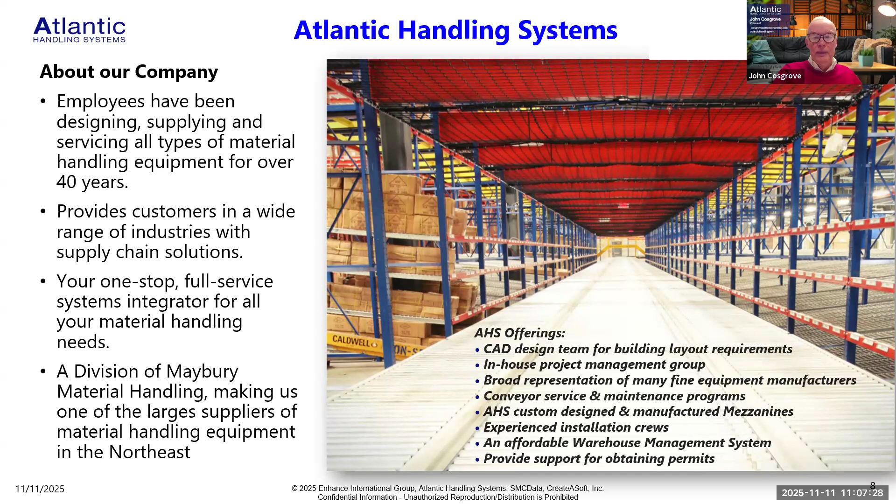Good morning, everybody, thank you for coming. I represent VAI for the past 25-plus years. It's a single database software that has manufacturing, distribution, food, and pharmaceutical in it. Single database—there's no need to have multiple software that can create integration issues. VAI has 200 employees, 5 locations nationwide, and support 24/7. 90% of the 200 employees are technical people. Training is done on site, and after you go live, the technical team and support team stay on site until they ensure everything is working well.

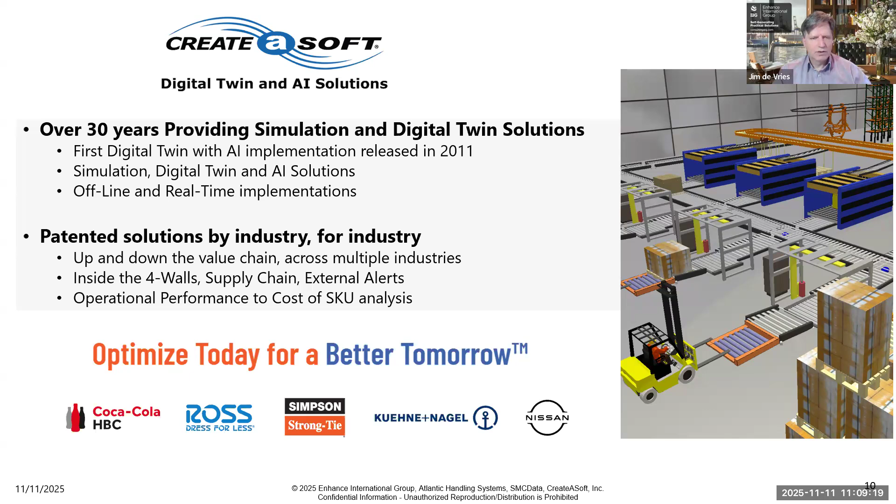Thanks, Hosni. Thanks, Danny, and thanks, John. We look forward to a very interesting webinar today with lots of feedback from everyone. Our agenda today is we're looking at the challenges of leveraging AI and automation in your facility, and then we'll get into the remedies to overcome this through this joint venture of our different partners here, and then we'll walk through that solution from consulting all the way through ERP selection with Danny's system and how that works, automation of equipment, and of course the AI digital twin. And then the role of the digital twin will be addressed, as well as benefits and return on investment. And then the case studies will be interlaced throughout the webinar, just to let you know.

Let's get started with the challenges. So the way we look at it is there's a convergence, over the last 10, 15 years, of operational technology, meaning your physical equipment, your SCADA systems, all of your electronics on the floor and in the warehouse. And then you have your information technology that sits in the ERPs and the business systems off to the side. So somehow we got to get these things to talk to each other.

So there are some challenges in that and drivers. Some of the drivers, of course, we're trying to create that efficiency, safety, and sustainability over time. And then there's these legacy barriers that we've had ever since I can remember, which is how do we get these systems to talk to each other? Data are siloed. Most ERPs are financially based, not transactionally based, therefore a very big challenge. And then data is controlled within the silos. That's driving that trust and change management challenges that we're all encompassing.

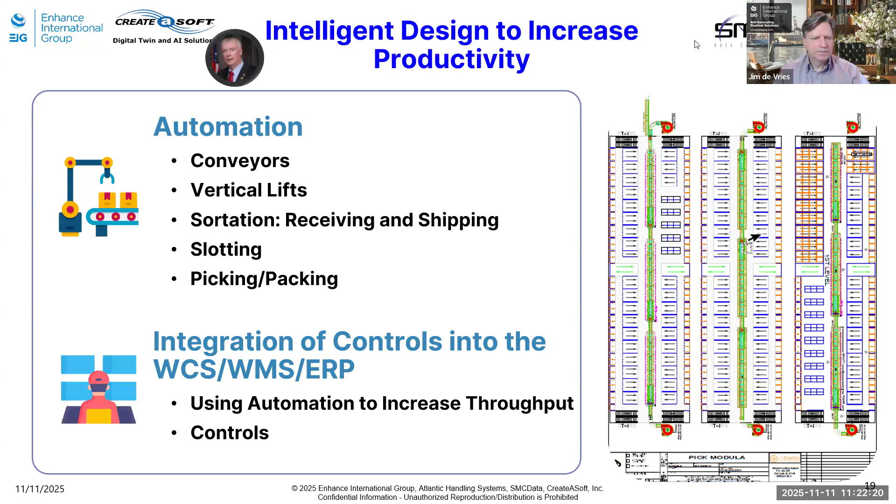Okay. So what you see here, we're going to walk through the solution: consulting, ERP, WMS automation, AI digital twins.

On the right, you see coming out of a pick module is a spiral conveyor, which takes up less real estate within the warehouse and helps you bring cases down that have been picked on the upper levels.

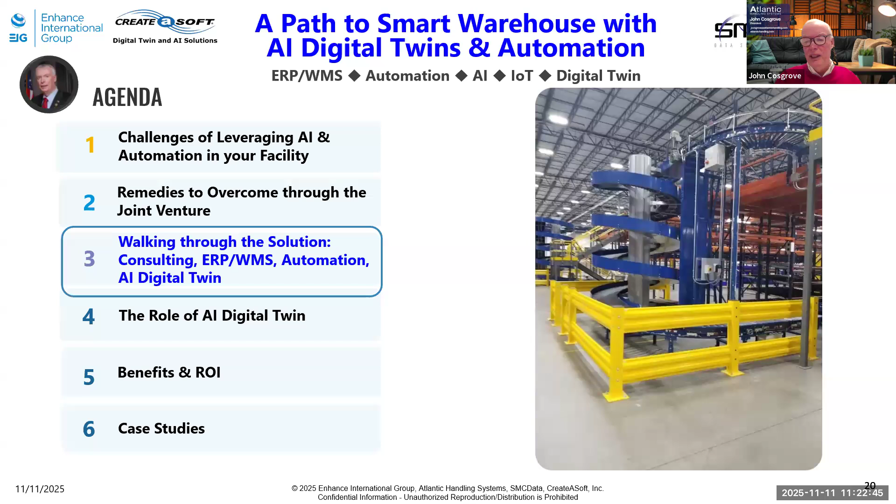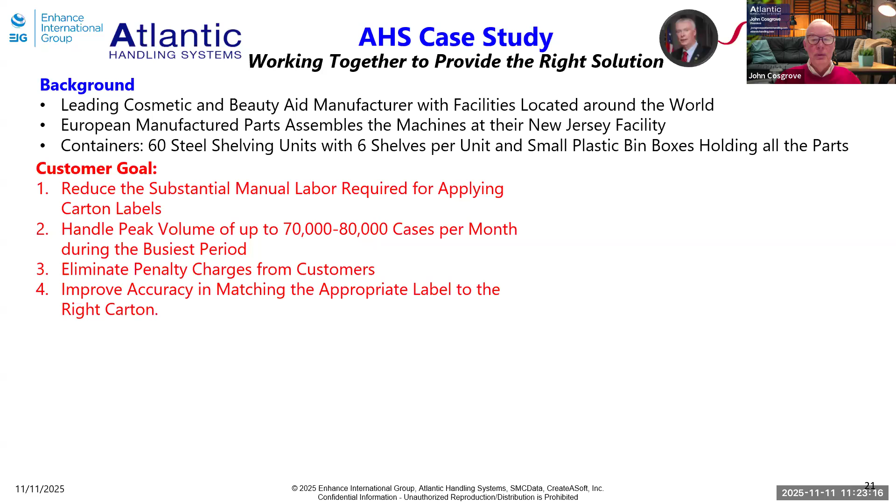This is a case study that we had done. It's a leading cosmetic and beauty aid manufacturer, located around the world. What they do is they came to us and they had a problem with applying UCC 128 labels by hand, and in August they would bring in 30 temporary employees, and we had to come in and help them to do that. If you go to the next slide, Jim, I'll just show you real quickly what we have.

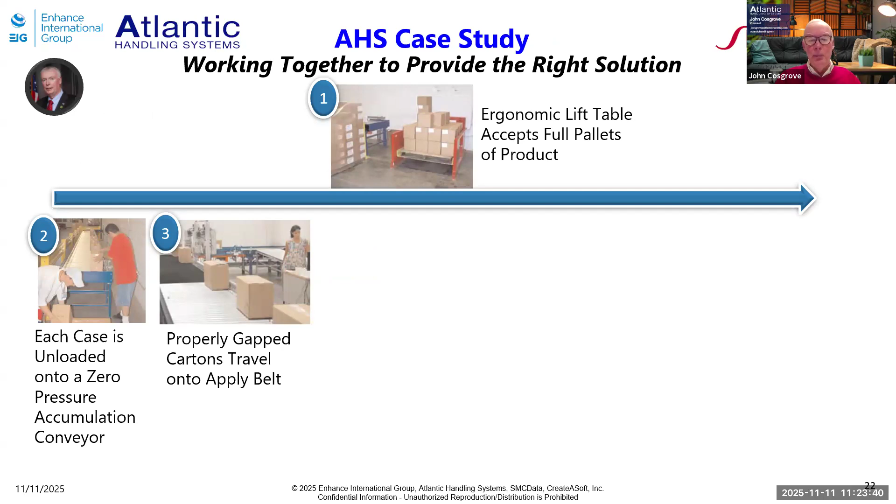If you look at it here, we start with an ergonomic lift table, which prevents back injuries and so on and so forth. And then they would load each case onto a zero pressure accumulation conveyor. We gap the cartons so that we can bring them into a print and apply station, where we apply 3 different labels that were required by their end users.

We run them through a barcode scanner to check and make sure that the placement of the labels is correct, because that averts any fines that might be issued against them. When problems are found, we have what we call a reject lane. If it's a bad read, we'll send it down the reject lane. Then all cases are sent down and sorted and loaded onto pallets for shipping.

This was rated by this specific Shiseido Cosmetics as the #1 project in the world, actually, and they won a big award for it because we eliminated 30 temporary employees. They were doing about 800 cases a day, and when we got the system in, they can do 5,000 a day now. Amazing, amazing, great story, John.

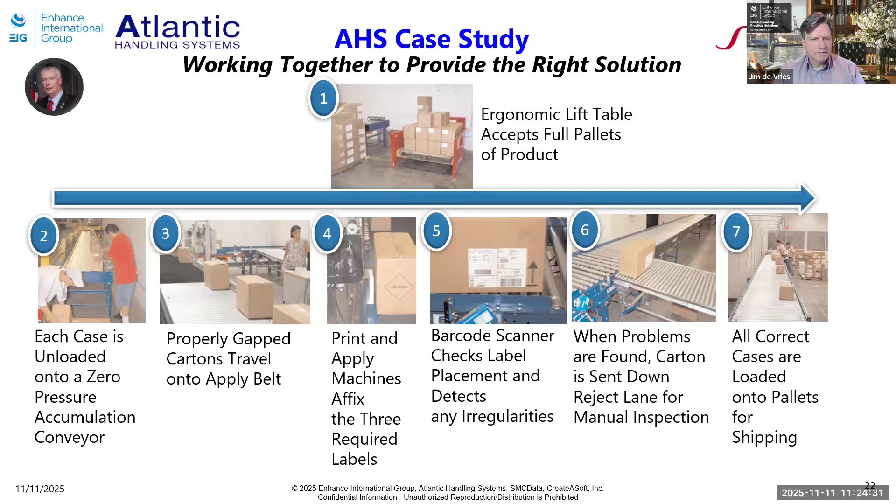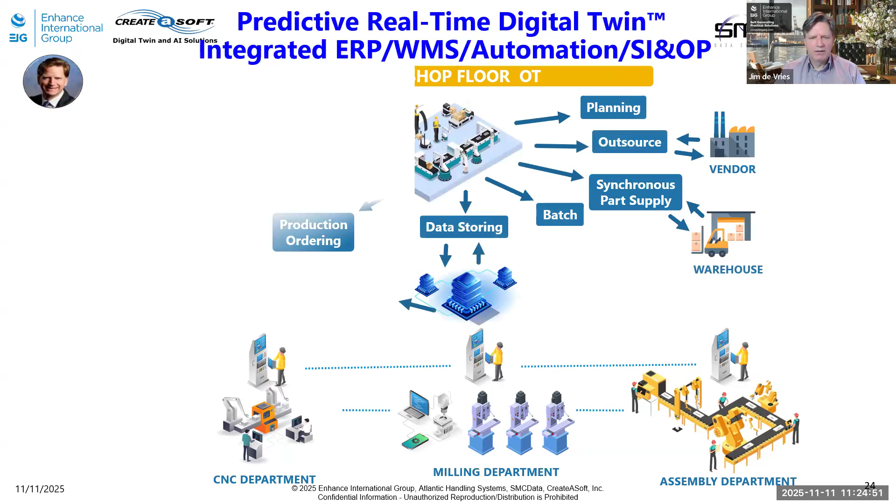So next, we want to get into the role of the AI digital twin. In any manufacturing facility, you might have a CNC area, you may have a milling department, you may have an assembly area, but behind the scenes, you have all this data for monitoring, planning, data storage, batching, planning and outsourcing, warehouse data, and you have your ERP.

So just wanted to show this diagram to say what we were doing is putting like a wrapper on top of everything, where we're pulling all that data from the MRP, the MES, the SCADAs, your Internet of Things, into centralized data marts, into BI. This is a traditional thing that most companies are doing as part of Industry 4.0. But what we're doing that's different is we're putting that wrapper on top of a real-time digital twin that allows us to do SI&OP live, because the data in the digital twin from CreateASoft is actually updating in real time.

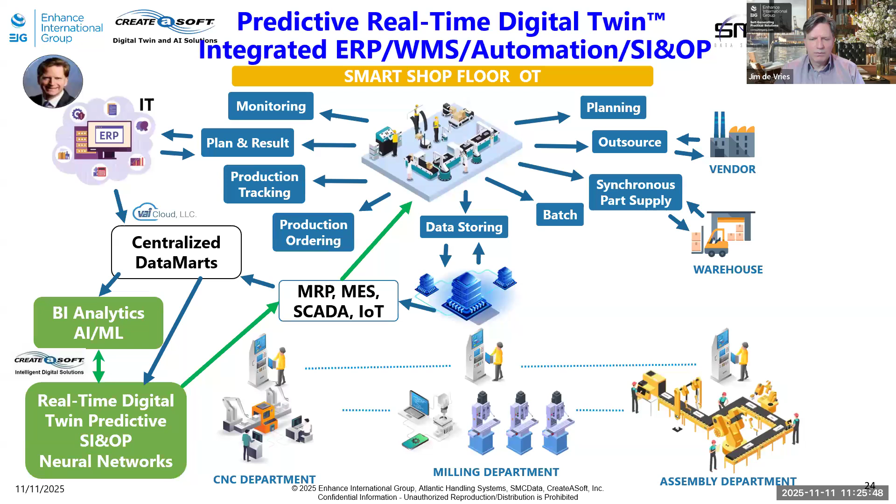And Hosni will explain a bit more about that. Thank you, Jim. So before we go any further, let's make sure we're all in agreement on what we call a digital twin.

A digital twin is a true representation of the live environment. It's not a pure simulation, it's not a visual representation. It is an actual plant or warehouse that works exactly the same, dimensioned exactly the same as the actual facility. It has all the components for all the materials flowing through, the material handling, the people—everything that runs within the live environment is in the twin. So this is not an approximation of live. This is as close to live as you can be, within 99% plus accuracy throughout the operation.

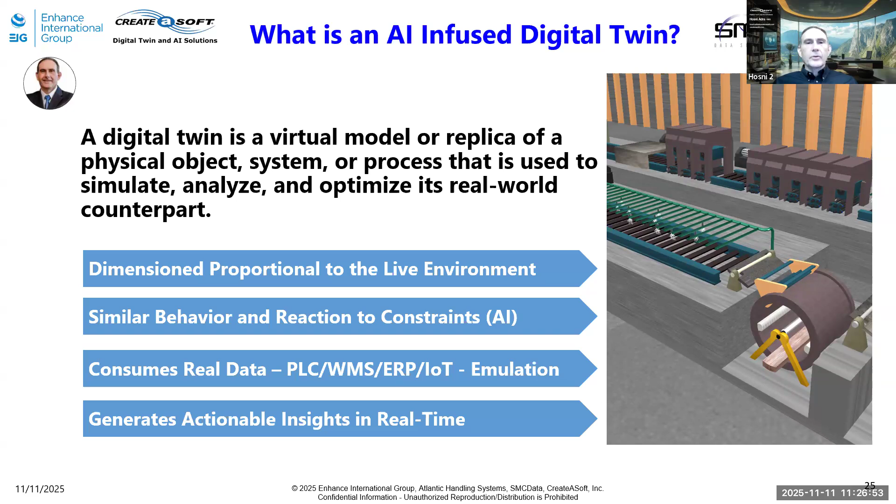Now this is also giving us a path to go to AI in real time. As you'll see as we go forward, having that specific data set will allow us to have more predictive insights and more accurate insights on what's happening and what will happen to the operation.

So if you look at any smart warehouse, you definitely have a WMS and ERP like Dani's system. This controls everything within the data itself—what's going into the warehouse, what's coming out. So this is your receiving, your replenishment, your put away. A lot of these systems have some kind of slotting environment built in. They have a scheduling system that's waving or providing data into the actual warehouse itself. So all this drives what happens within the warehouse from an ERP.

In some occasions, the ERP system and the WMS can actually send data to the automation, like in John's system, where it will tell the automation what type of labels it's going to print, what type of machine is going to print, what color. All these become components that are driven from the WMS into automation that John has built.

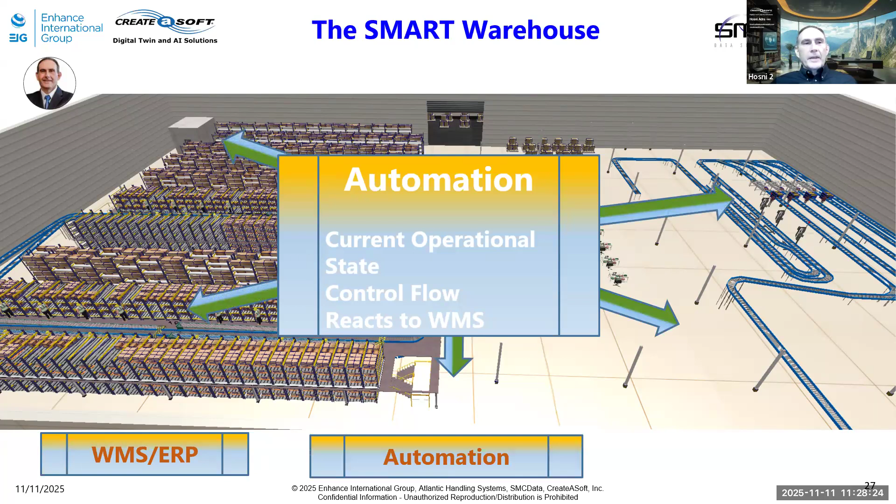Now that automation goes beyond just the print and apply. It goes into every single divert that you'd have within the warehouse. It goes through where you slot, how you move in the pick mods. All these become part of that integration from the WMS to the automation system.

So you take all this together, and there's a lot of data between them. Keep in mind, in this specific implementation, all the products have different sizes. Some of them are clothing material, some have weird shapes, some are just pure boxes that cannot be crushed. So there are a lot of limitations on what you can do within that.

So this is where AI comes in. Now we can put all these rules into an AI system that is properly trained, and it will start to identify better where we slot things, how we do our put away, when we replenish—all these key things required for daily operation that tie in the automation of what's happening live and the future of the operation and the demand planning coming from the WMS. So it puts all this together, and now it starts to operate the warehouse in a much more efficient way.

We got a question here, Hosni. Sure. So are we moving from collecting information on what people are doing to telling people what to do? Is that the flip you're working on, or are we recording what people are doing? How does that work?

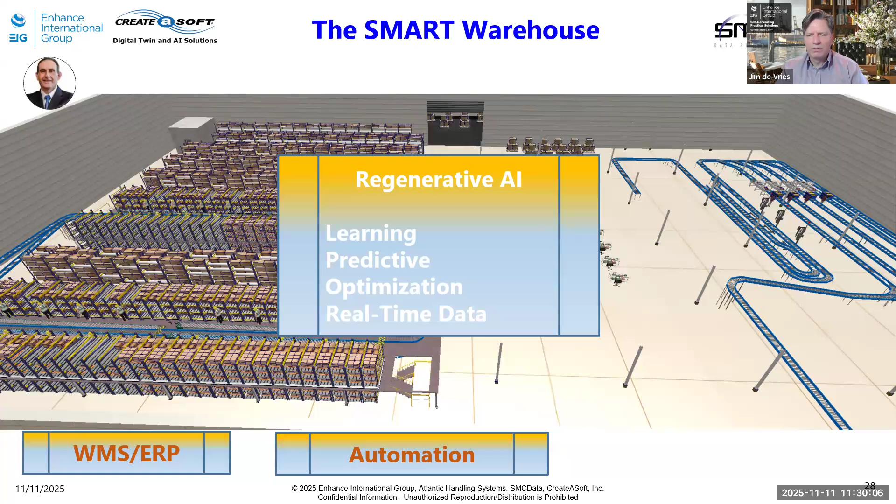So we will get into the recording of the people. Initially, we have the data that's readily available to everybody. Everyone has an automation system that produces a set of data, whether coming from the PLCs or different control systems collecting that data. And then you have the ERP and the WMS that has the demand, the receiving, what I need to ship, and what I have in the warehouse. Now as you go forward in these, there will be—if you want to skip to the next slide, Jim.

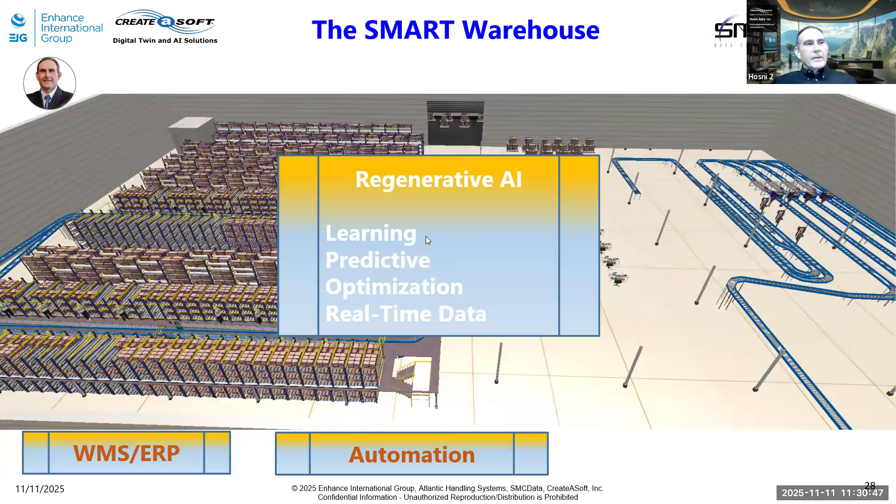So there will be additional data components that you will gather in regards to people. And this is where everything that is scanned, every movement that you would have, your automated guided vehicles, your fork trucks that are moving around, the person that's picking things from a pick to light system, all these become data feeds that you will send into that digital twin.

Keep in mind, the more data you have, the better the twin is going to behave, the better the twin is going to learn how your operation works. But as we talked before, that data already exists in your systems, it's just segmented into different silos. And what the twin is now doing is combining all this to provide a complete view of the warehouse, and it's using that complete view to plan the full operation.

So if we go to the next slide, a lot of times you would have additional data points. Some of you are using IoT devices to track things. Some are using RFID or GPS type devices, or some other components that are providing data from the real world system. These are crucial.

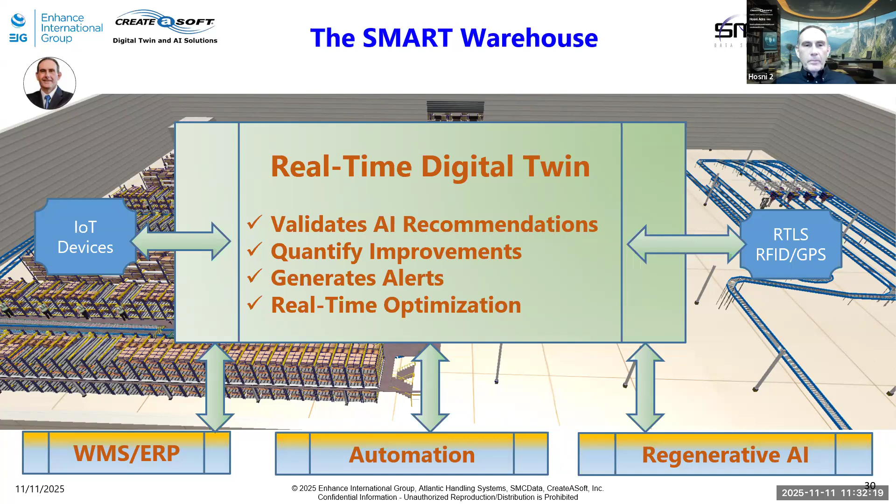If you have those, they definitely have to be funneled into the digital twin, and that will give you the current state of the equipment. This will tell you how many guided vehicles you have running, how many operations, how many AMRs are running, when do you actually need to charge. All these different things that occur within the operation become integrated into that digital twin.

So the automation we get to put in shows fork trucks with put away. It's all being analyzed by the digital twin constantly to give us a solution, in real time.

Hosni, just to let everyone know, on that bottom left-hand picture, that's also a cosmetic company that we did a print and apply for. But if you look, it's hard to see, what we did there is we have an overhead conveyor, and we bring the cartons in from a carton erector on an overhead conveyor, so it doesn't take up a lot of space within the pick module. It's just a little something that we do to try to make it more convenient and more efficient.

So there are some questions in the chat. I don't know if you want to get to them, Hosni. There's a question on what's the definition of the digital twin.

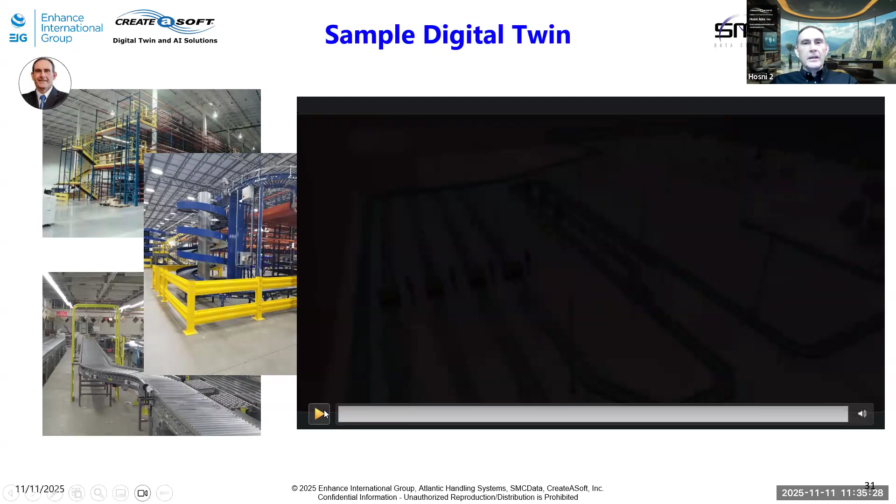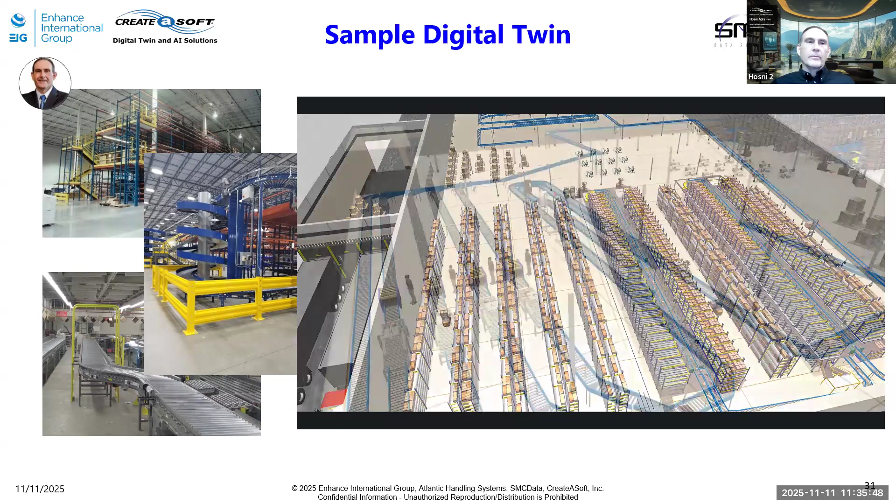In my opinion, a digital twin that is purely visual is just a visual representation of the plant. It doesn't really give you any operational value. It gives you a representation of how everything will fit together, whether you have the proper layout, from a spatial representation aspect. What we're talking about here is a digital twin that is not just visual, it is operational also, so it does have that additional factor to it. You can definitely just stop at the visualization aspect of it, but you will get half a solution basically.

That leads very well into building out a digital twin.

As you're building the roadmap, there's a 3-step process to get to real-time implementation. First, you start with a model build, actually building that visual representation initially. Then you start to add the constraints to the model, and these constraints apply to different aspects of it.

Then we transition to the analysis, optimization, and actual loading of your data set, looking at historicals and trying to load and train the AI engine. Then you go to the third step where we turn this thing live and turn on the regenerative AI, because the system constantly learns as the operation advances.

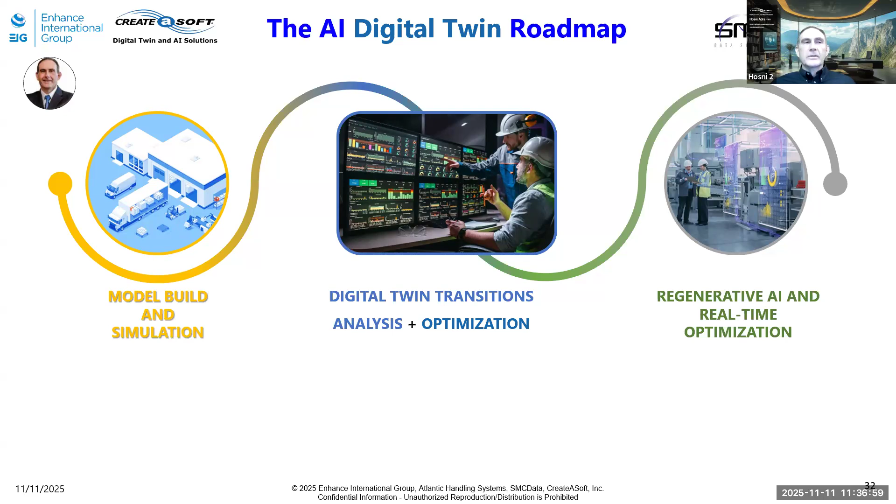From an ROI perspective, you start to achieve an ROI basically in phase 2 — that's when you first see your initial ROI. With an average size operation, you're looking at a 90-day start to end implementation, where at the end of the 90 days you're generating an ROI much more than what you invested in that digital twin implementation initially.

And that's really using data — it's not using ideas or concepts. It's actual data fed into an AI that's validated through the twin before it's provided to you as a solution. Just to build on that, it's the actual distributions.

If you're a stat person, you know a Gaussian distribution is a representation of a process. This is actually using the distribution of the actual process, and as that process changes, that analysis changes — that's what's unique. Folks are taking the average of an average of an average, and then they wonder why half the time they get it wrong. Eventually that'll get you some improvements, but it's not going to get you sustained improvements as your ecosystem changes, and no ecosystem stays static out there.

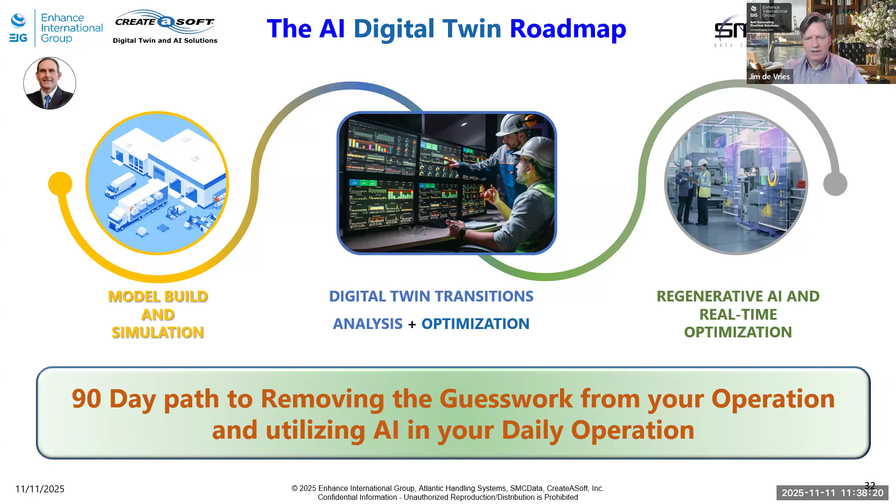So that leads us to the next slide on the simulation side. This is when you're at the beginning of the implementation, trying to validate that the actual implementation has the constraint, that it's working. This is what we call a traditional simulation implementation, where you use distributions to validate and test the model itself. Keep in mind, when you do that, you cannot optimize randomness.

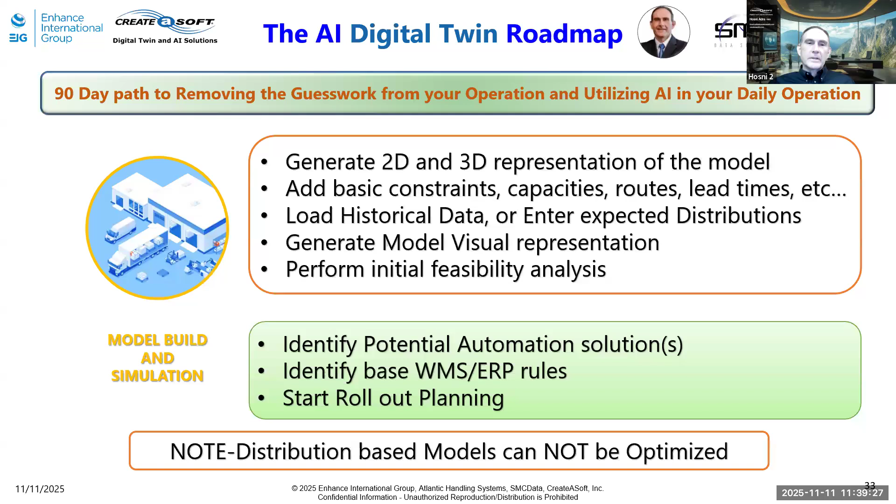So when you put all these distributions into what will become the true digital twin, you're just using random data generated by a random distribution, whatever that distribution is, and you're trying to optimize it. You get an optimized randomness of the model, which gives you an idea of what works and what doesn't, but it doesn't allow you to do real-time optimization — it gets you 80% of the way there. So we don't want to stop at 80%. We want to actually get to 99%-plus optimization that will work every single time.

So that's where we get to phase 2 of the implementation, where you start to dive into the data itself. We feed the data in, and now we turn that model into a simulator and emulator of your environment. This is where all the constraints come in — all the size of the boxes, the actual true sizes, the way the pickers are picking, their productivity, their lead time for that specific day — everything related to every single aspect of the operation now becomes part of the data fed into the system.

So with this implementation, I can validate the logic in the WMS. I can properly identify the logic that can go into the automation from John's system. And then I'll be ready to go live with any implementation, knowing with a high degree of confidence that I'll be able to roll this thing out and not run into all the issues that happen when you turn the system on with only 80% confidence that it'll work. Now you have 95%, 99% confidence that this will actually work.

So we have a couple of questions here. Can you describe a what-if scenario that you would do on a digital twin once it's up and running smoothly? There are two questions here that actually pertain very well to the slide. A lot of the randomness that's put in is really not randomness — it's AI generating when that fork truck is going to fail.

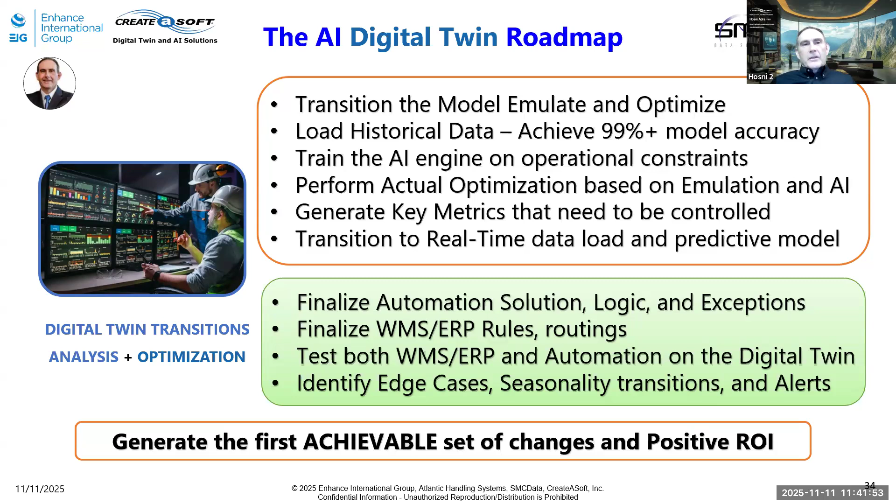The what-if analysis will always happen. As you'll see as we go through, there are a few types of analysis that happen either in the background or where they're requested by a user. And this is where we go into this section here.

If you go to the idea of how the failures happen within the operation, that's where regenerative AI comes in. What happened last week could be different than what's going to happen next week. There are all these constraints.

So if we don't keep feeding that data and those constraints into our AI engine, we're basically stuck in the past, and we go back to the exact same problem that we have today. We're analyzing last year's implementation. So that regenerative AI becomes key.

At the same time, the system in the background is identifying, for example, that there is a downtime. This is a what-if scenario that's going to happen. Instead of you as a user going in and saying, I need to run and see what happens if that machine goes down, the system automatically detects it. It runs the what-if, and it says it's expected with a high degree of confidence that this condition will occur. And by the way, this is how you fix it when that happens.

So now you're more proactive in the implementation. Instead of constantly running your what-ifs, we're letting AI suggest what the what-ifs are, running them through the twin, identifying what the potential optimization is that's required, and providing them to you on the other side.

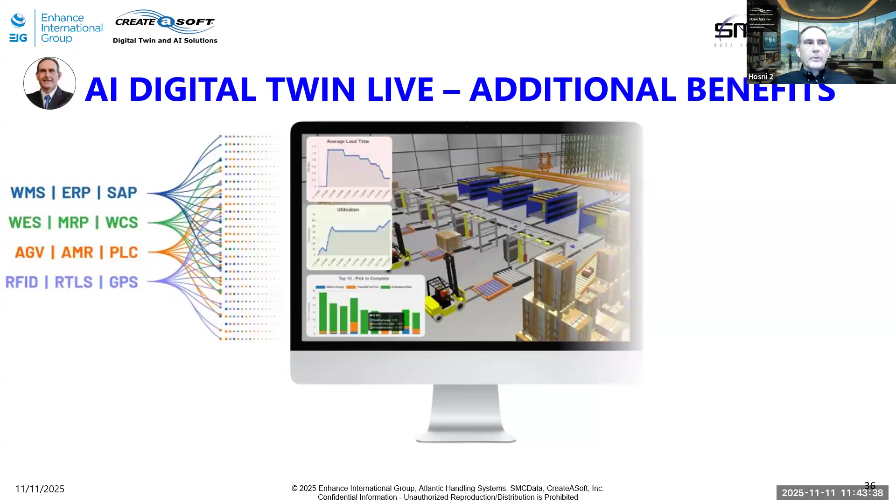There is another aspect of it where you actually have a sandbox where I have an idea and I want to test it out. This is where you run it in sandbox mode where you have all of the data. You don't need data collections anymore. You have all the data available to you, and then you can run in sandbox mode where you're basically disconnected from changing the operational value, but you're doing that implementation live.

So the idea of what we're trying to do between Danny and John and myself and Jim is that we're creating that single view of the full operation. You don't need to look at 15 data systems anymore. The data and the analysis and the optimization is all done in one.

You have your automation equipment feeding data into the twin. The WMS is feeding data into the twin. Everything is now collected and fed into that AI engine to actually help you run the operation faster.

So sometimes you get a 3-4% improvement on a daily basis. And other days, you will get 10-12% improvement. But this is daily operational value that you're saving on a day-to-day basis. It's not a one-time shot where I do analysis, I'm done, and then I move on. It's constantly running in the background and giving you those operational insights into the operation.

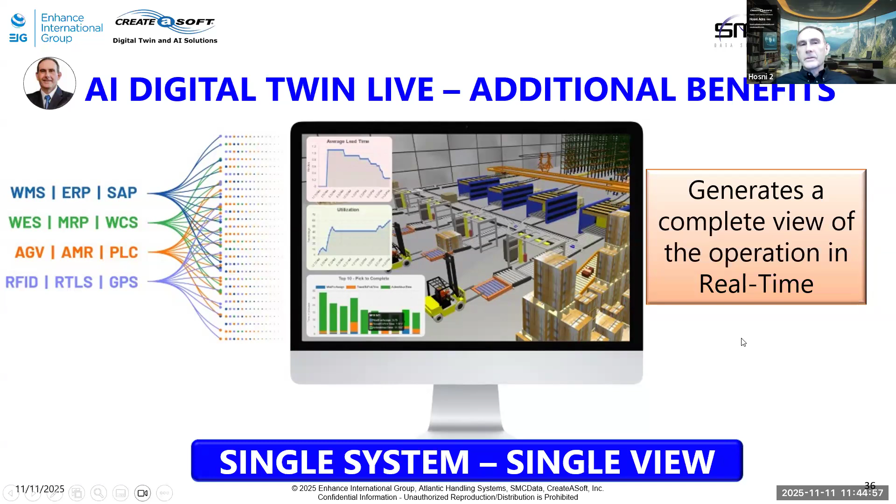So this is an example of the system where we have the WMS feeding data on where to divert each one of these conveyors, each one of these boxes. This is the print and apply and identifying the labels.

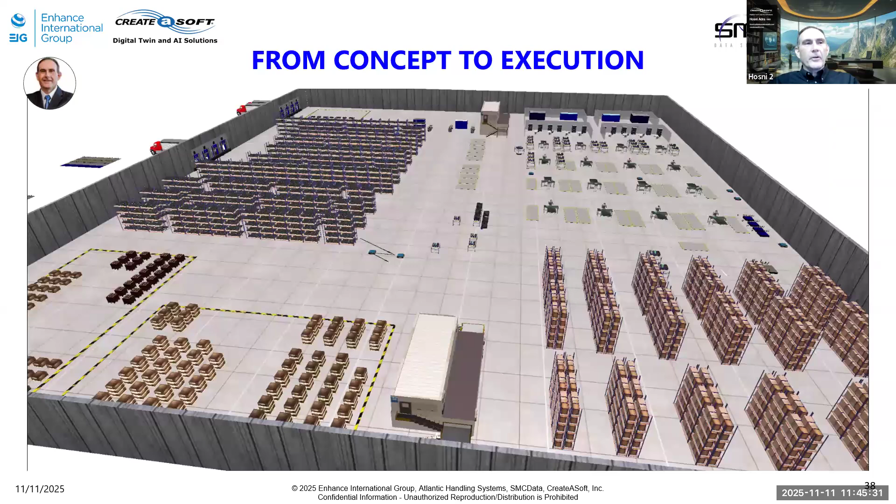Now, this is what you actually would see on the twin, right? So it's John's system reacting to the data from the WMS, Danny's system providing the data itself into the automation, and providing everything else to the environment all the way through.

John, Danny, want to?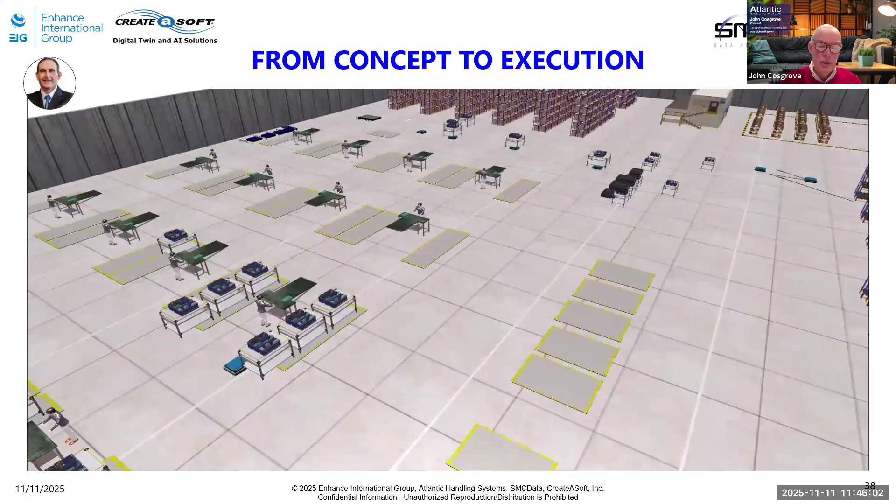Yeah, the integration, what's great about it all is the validation. When you look at this warehouse and you spend a considerable amount of money on automation, it's nice to know that you can actually see the results real time through the simulation. And then the digital twins will verify that and continue to do that.

And there you see some AMRs that are running. You see a lot of those in the Amazon commercials where they're actually taking the shelving units and transporting it to the person as opposed to the person serpentining through the warehouse. But when we do these kinds of things, it's a large investment, and the verification through the digital twins and the AI solution is great.

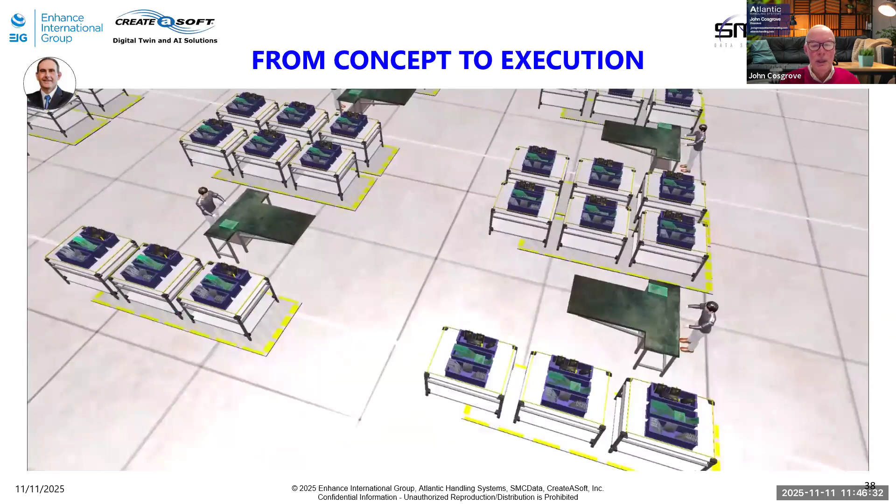So I think between all of us, between Dani's WMS feeding me what I need to make my controls work, and then the validation by the digital twins and simulation is a really great tool.

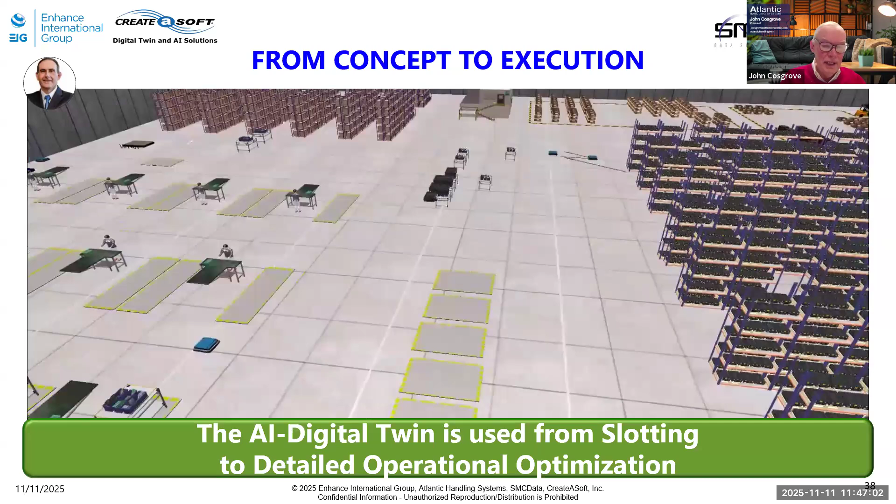Any additional comments? Well, just you're talking about slotting. When you build a pick module like that, it might have thousands of different SKUs. So what happens, because the digital twins is constantly evaluating, you can move SKUs around. Some are seasonal, some need more than one facing within the pick module because the frequency is so much, and the twins will help to let the system know that.

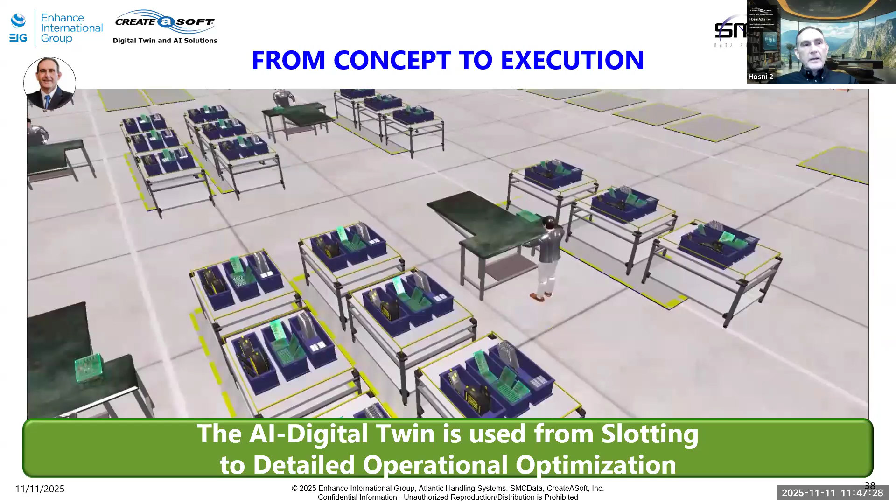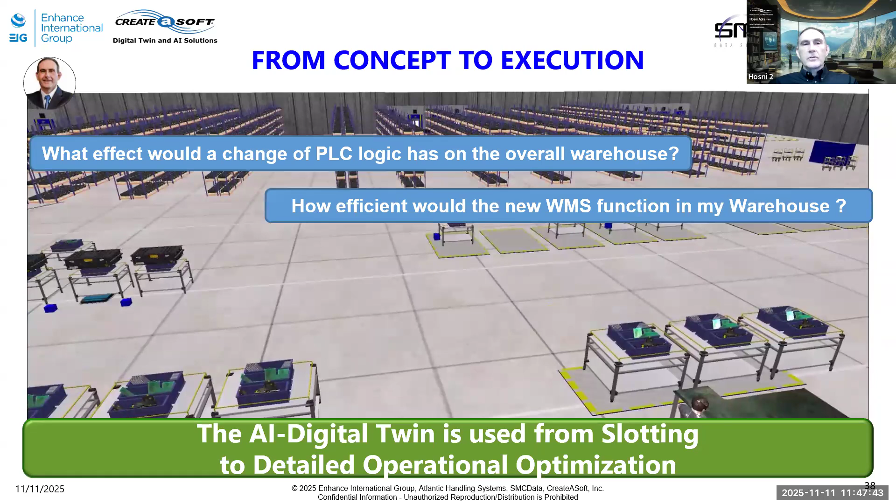So with that, you can actually get a lot of data from the twin and the automation feedback and the WMS and IoT and any RTLS systems that you would have. So these are all things that you can run on a what-if basis, or you can let the digital twin run for you if it's running in real time.

So these are all different aspects and different questions that people would ask: what if I do this, what would happen if I change something in the WMS, or I want to get different types of guided vehicles, for example, to run through. All these are aspects that you can always run, and you can always run them in that sandbox, or you can let the twin figure out what is the best optimum solution for you from that point of view.

So operationally, the very common questions for warehouses: how many pickers do I need tomorrow to be able to run the warehouse and pick and deliver on time? Another question is, what happens if there is a snowstorm coming in and it's predicted to come in the next 3 days? How do I mitigate that in my warehouse so I don't run into delayed deliveries for my operation?

So these are things that you can start to apply either inside the four walls problems or outside of the four walls. And then you can tie that into your cost of unit, cost to process an item. That cost of unit becomes a key component that you can track on a minute by minute basis, basically, all the way through the operation to see how it varies.

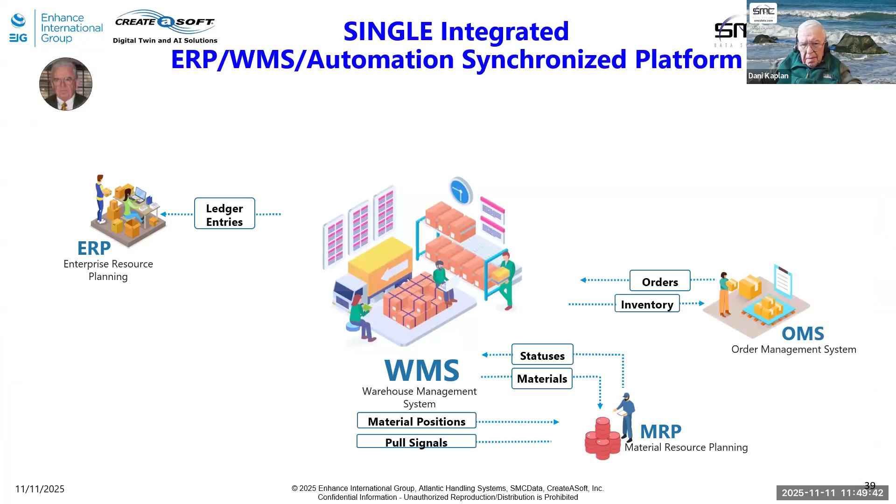As you can see, the integration issue is a crucial piece of having the WMS with the ERP, with the twin, and the warehouse. If you have separate islands, separate modules of ERP, one vendor, warehouse, another vendor, you have integration issues when upgrades happen. The integration creates a broken link, and the broken link will create a domino effect of business disruption and data inaccuracy. So having the one-stop shopping you can see here of everything integrated together makes a very smooth operation, and the data is very clear and accurate.

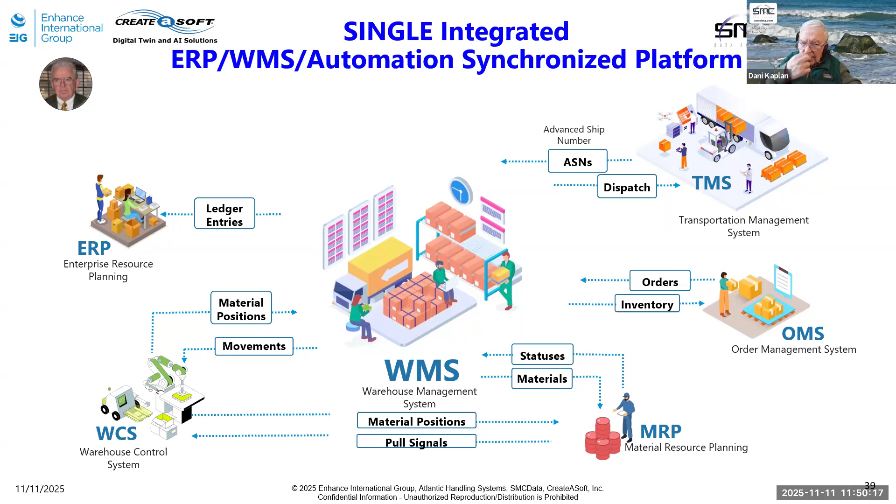I can't stress enough how important it is to have the warehouse integrated into the WMS as a one-stop shopping. Otherwise, when there's an upgrade, you have multiple vendors, and if an issue happens, AT&T blames Verizon, Verizon blames T-Mobile, and T-Mobile blames God. In the meantime, the inaccurate information affects the domino effect across the board, the twin and the warehouse.

All right, so just a couple of questions I want to address here before we move forward. As you know, one of the questions is, can the digital twin actually predict and simulate what will happen in the future? That's exactly why we're doing it, is to actually have it as a predictive tool with a high degree of accuracy to tell us what will happen and how do we actually modify the operation proactively so that we minimize the impact of that disruption.

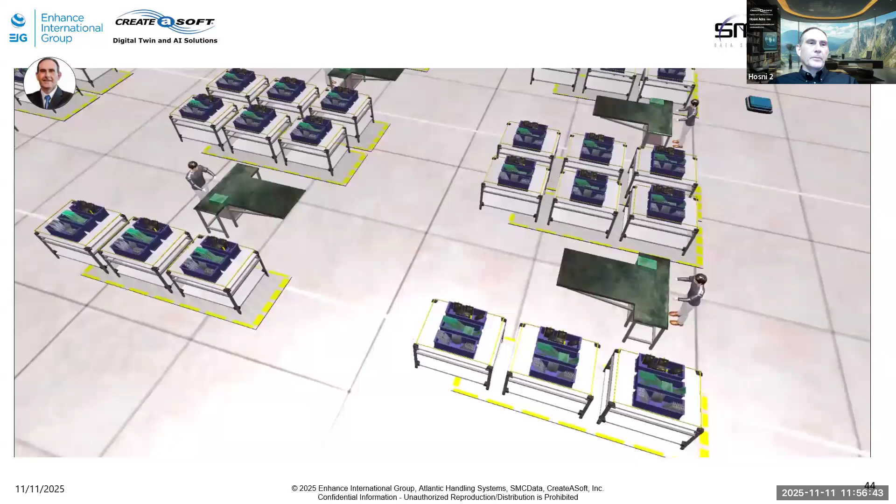We can minimize, but we cannot eliminate people. Everybody can have a better outcome, and it will factor in the fatigue of the person to identify who's going to do what and how things are going to move. You can control automation, but you cannot control everything else within the system itself. It all comes down to productivity. We're giving people a way to become more productive and to help and support them in their efforts.

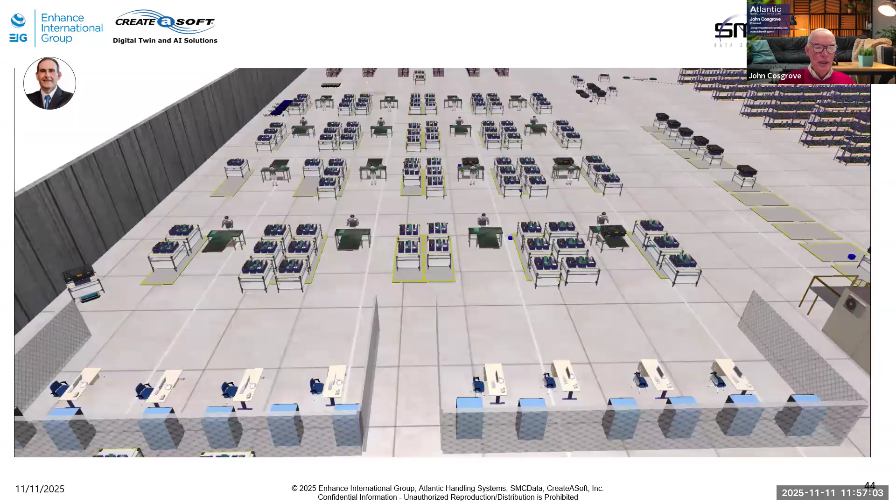Okay, so just some sample data. When you look at optimization, you can identify what type of optimization you always want to run on a half-an-hour, hourly, or daily basis.

It can automatically reslot and rearrange what's in the pick mods for you, for example. It's going to tell you whether you're going to benefit from that reslotting. Keep in mind, since it doesn't have an ego, sometimes it says, no, you're actually doing a good job and there's nothing to change. That actually happens in some cases, and it's going to show you the variations all the way through.

This is all automated systems running in the background and generating that data. It's going to compute all of your ABCs and the variability of the products in real time. You don't have to do that offline anymore.

It's going to show you the variability, specifically if you have seasonality within the warehouse. That variability in demand and shipment is going to drive how you slot. So instead of very quickly changing your warehouse from one season to another, that AI engine is going to help you transition slowly between seasons so you don't have that problem as you go through.

Go to the next slide. And then, just one thing I'd add, there's the productivity of the people that comes in - that LMS tracks productivity of everybody within the operation. That's all built in, since we have all the data from a digital twin perspective.